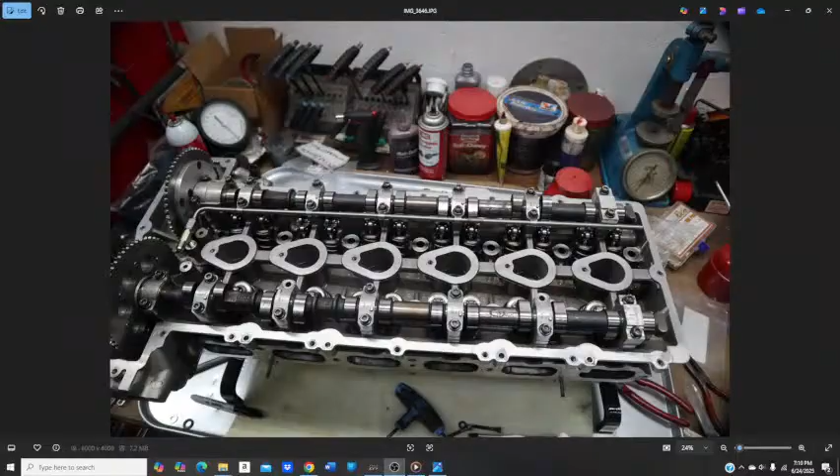So I want to go ahead and give you guys the 4200 update. So let me bring this up. So here's the new oil line. I've got it made. I've got an exhaust piece made. And as I talk to you guys, let me see if I can. No, it won't let me go back. There was a plug, a galley plug here in the. You know what? Let me go back for the people that may not have been here for the last one. Oh, I know why, because it was here. Let's see where we're at.

So with the 4200, we had an issue with...

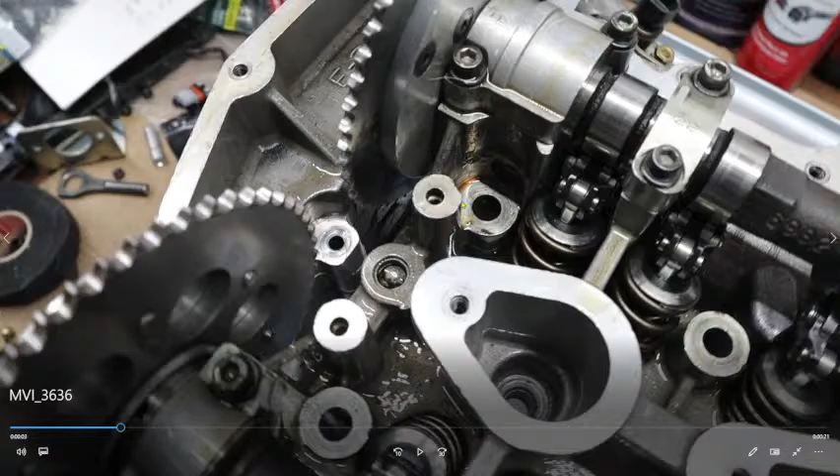We had an issue with the 4200 where we were getting dry exhaust valves, mainly because the exhaust has got a lot of heat in it, but there wasn't enough oiling going to them. And these lifters that are in this motor are solids, and they do not have an oiling system in it.

So we figured out that the only way we were getting oil in was around these caps. It was kind of squeezing oil out, and then the camshaft would start flinging it around. Well, obviously we had an issue, and that's not enough oil. So this was my idea to put some oil lines across here, like they do in NASCAR and endurance racing, where they put oilers to spray cooler oil on the valve springs and get that all working.

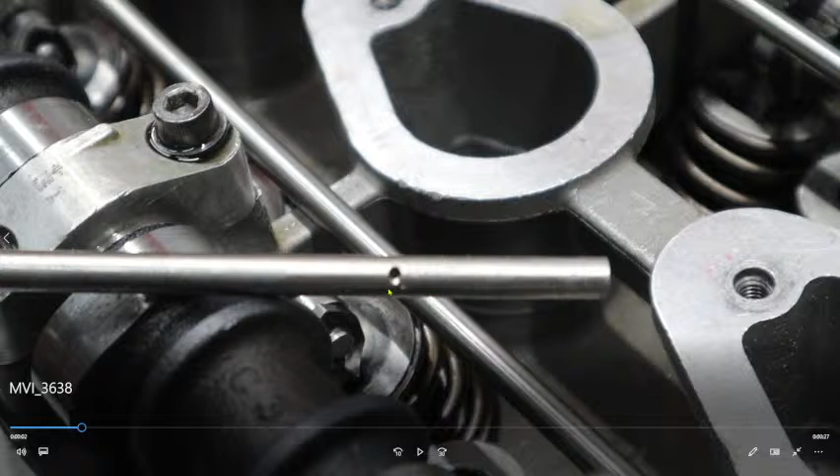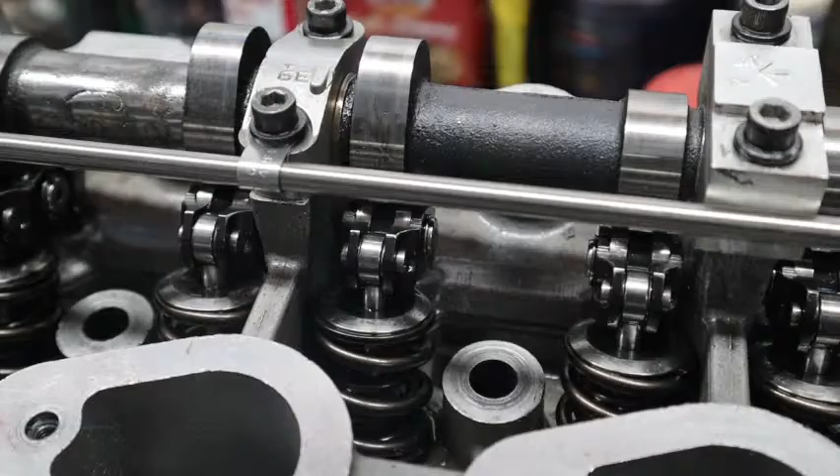So that's what my plan was. What we're going to do is drill a hole. And some little videos I made, just drilling a hole in the tube and laying it out. All right, so after several, went ahead and got the plug out and found out there was a machined hole going into the oil cavity, so that was perfect for us to pick up our oil from. Then I came up with these mounts to hang the lines along the caps. So that's kind of a catch up where we were.

So where's my pictures? All right, so let's go back here. I thought I had pictures on there, but I guess I didn't.

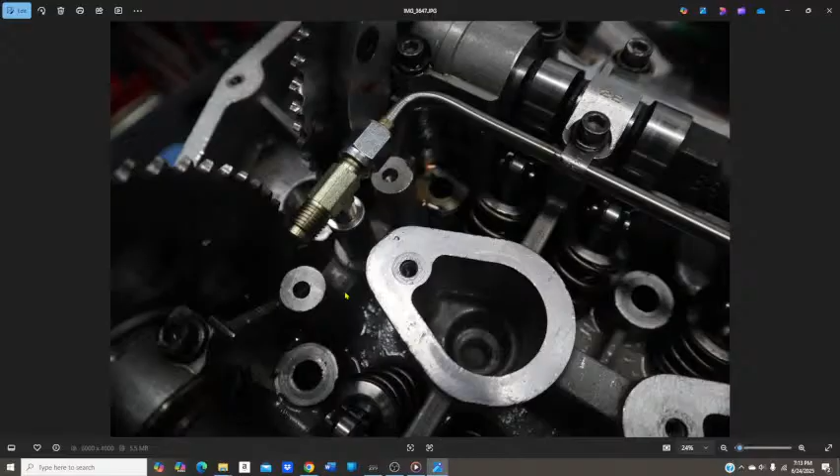So here's our exhaust side pretty much done. I still got to cap this line at the end here, and I still have to do the intake line. I decided not to spend too much time yesterday on it because I had other things I had to get finished with, but at least we got it moving forward. So here's a close-up of, I machined a piece with an O-ring in it so it sits down in the galley hole, and then put an 1/8 inch pipe thread up here.

So with a T piece, I guess that's a T on the street. It's not on the run, but it's -4 on both sides, and then 1/4 inch stainless line with the oiler hole pointing straight down on the retainer on every line. So here, I went ahead and oiled it up, using an oil can. So I don't know if I had any sound on that. Let me replay that again.

So basically what I'm doing here, see if I can get one picture with the oil squeezing out. So there's a hole on every retainer, and right now the line is open all the way to the end. So when I'm pumping oil with a hand pump, there's no restriction. It's filling the whole trough. That's why you don't see it streaming out very heavily, but you kind of get an idea what's going to go on there.

Now, next week I'll have a video of the rails all done, and I'll pressurize it with my Accusump. Right now that's up in Riviera Beach at the Allnick because I need to prime that motor before I turn it over. But I think it's going to work out really well. So my next goal will be get the intake tube done, plug the ends, and then I'm going to use the Accusump with 3 quarts of oil, 60 pounds of pressure on it, and inject the oil and stopwatch basically how long it takes for 3 quarts of oil to go through the cam journals and the oilers, and that'll kind of tell us if our restrictor is the right size or not.

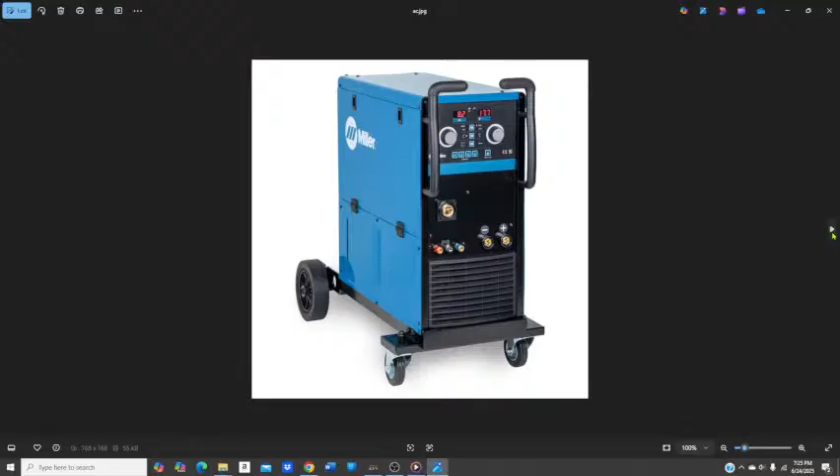See, Mike's in. I can remember my uncle used coat hangers to weld in patch panels on his Chevelle back in the 80s. Yeah, a lot of my dad did. My buddy Bobby in Boca that does a lot of metal work, he's done that also. But like I said, the problem there is, and we're going to get into that, there's no inert gas shield over top of your weld.

When you weld, you're getting the metals to a molten state, and most sheet metals and chromoly and all those kinds of metals have different ingredients. It's not just straight carbon steel. There are different components to make up whatever strength steel or stainless or chromoly or titanium. So it's not just a straight product. So what ends up happening is some of those ingredients in the steel will start melting at different rates, and without a gas shield, oxygen gets to it and oxidizes the weld. So you end up with a very weak weld. But back in the day, it was very easy to do, and guys would do it.

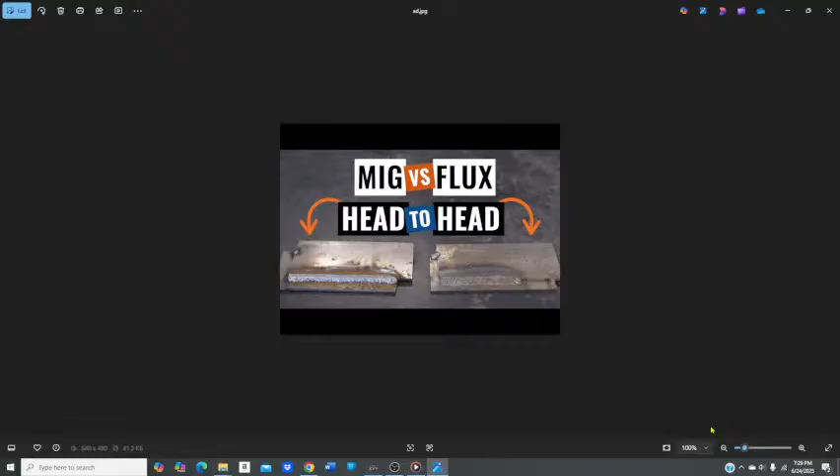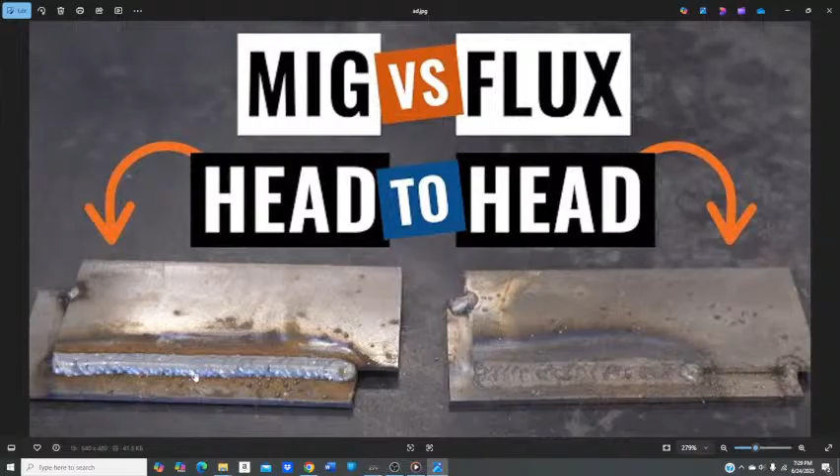So before I was talking about the flux core, and just to show you here, here's a gas MIG, and this is a flux core MIG. Both of them use the same gun, the same machine to make the voltage and amperage, but you can see here with the inert gas, it's a much cleaner weld, because now the gas is making a shield, and when you got the molten metal and the wire feed going in, which melts also, it's got a shield of gas to cover everything, and that keeps all the contamination out.

Now, one bad side of MIG welding is you see all the spatter here. There's a lot of spatter that comes out of MIG welding, so it's not the cleanest weld. You have to go back and do a lot of cleaning. The other thing with MIG, no matter which system you're using, whether it's flux core or shielded gas, is that you have one temperature setting and you pull the trigger and weld. So when you're welding like sheet metal and stuff like that, it becomes a little bit trickier, and that's where you have to do a little bit more practice.

Sometimes, instead of doing one continuous weld, you have to do large spot welds, moving back and forth, say like skipping every 2 inches and going back, and then get to the end and then start at the beginning and keep stacking your welds to get a finished weld. Because if you continue welding at one heat setting, you'll need it hot to start, and as you weld, now the steel starts getting warm and you can back off the heat. But on a MIG torch, you'd have to stop and adjust the machine. You can't continuously weld without having heat build up. So that's one downside of a MIG machine, but it's good.

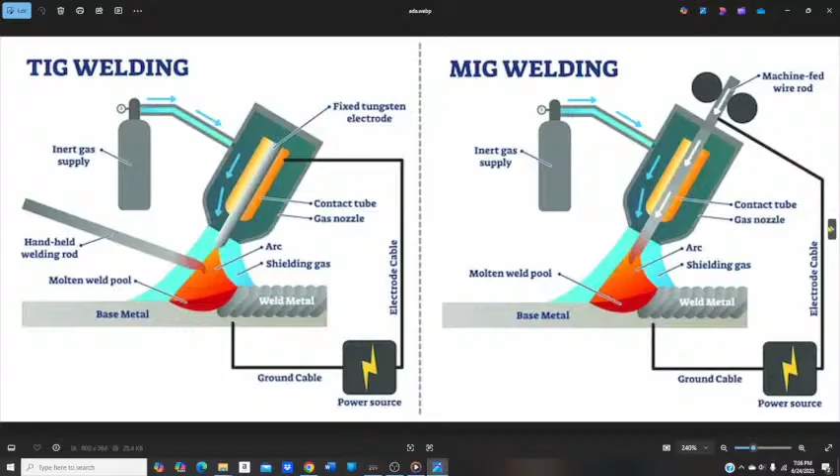You've got your metal puddle here, your molten weld pool. You've got the arc coming from your fixed tungsten electrode, and you've got your puddle of shielding gas. Now the beauty of TIG welding is we have different welding cups we can use. We have different diffusers we can use, so we can change the size of the shield gas immensely, and it just makes it much cleaner for doing different kinds of welds. We'll get into that in a little bit.

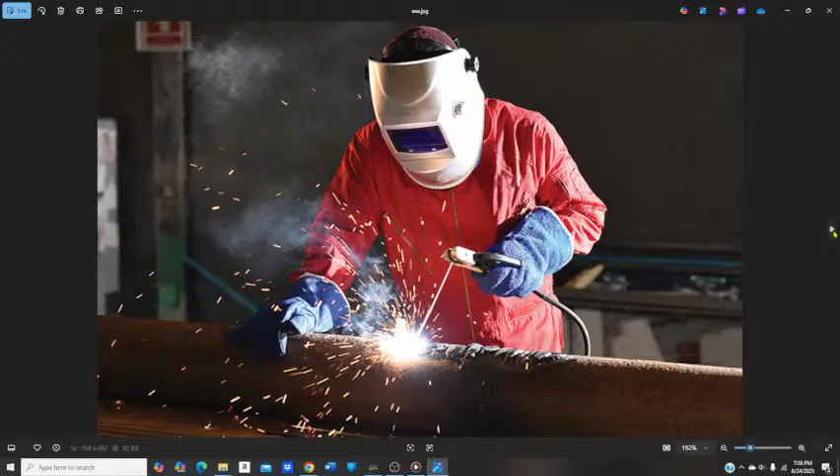There's another guy just doing welding, and this is where stick welding is really good. If you're welding heavy steel, pipe, stuff like that, a stick welder's quick and easy. They have all different fluxes and all different rod diameters. When I was in high school, I was working in Knoxville, Tennessee at Quality Welding, and that was a co-op thing. I was getting credit for work, and I actually built quite a bit of the I-beam for the 1982 World's Fair. And so we would use 6013 rod.

It was a 1/4 inch welding electrode, and the flux surrounding it was almost 1/2 inch in diameter. And I could weld 1 inch plate to 1/2 inch thick 12 by 12 I-beams for the base plates for the structures for the buildings. And you could lay that with one single pass, get a great weld bead out of it, and you just have to chip the flux off. If you use like a 70 series rod, a lot of times the flux will actually peel up for you. It's really cool how some of it will work.

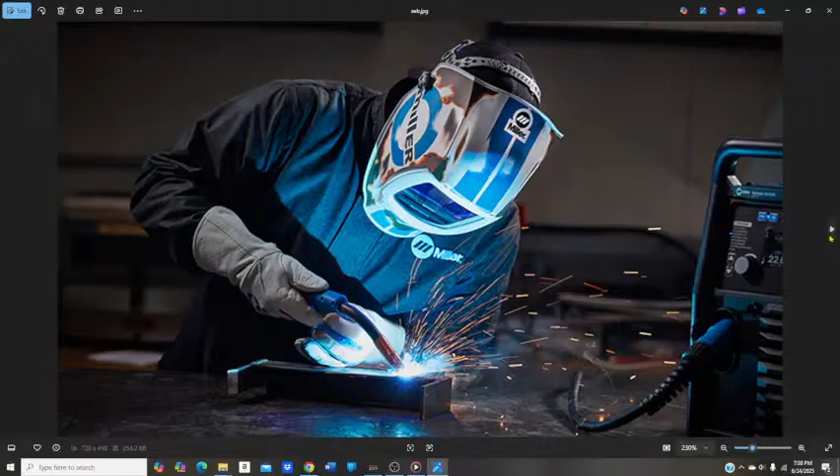Now this guy's using a MIG gun, and it's a little bit different. You've got a gun, you've got wire coming through the cable. You pull the trigger, it feeds the wire. You have two basic knobs on your MIG welder. You're going to have wire speed and amperage. Amperage is going to be heat. Wire speed is going to be the speed that the wire comes out and fills your puddle.

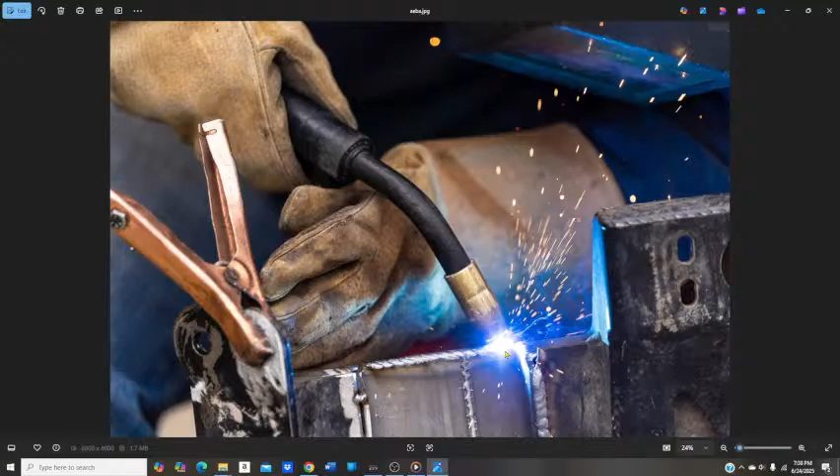So here you can almost see a shield there. The light is hard, but you can see the spatter coming off the weld also. So it's a very dirty weld process. If you're trying to do something clean, like sheet metal work, or you want to make an engine stand or something like that, more than likely you're going to have to do some grinding to get all the spatter off of the material. Otherwise, it's going to have all these little welded BBs all over your material.

But it's a very fast welding process. A weld like that will take you less than 30 seconds, where if you're TIG welding it, it could take you 2 or 3 minutes. So it's just different ways of doing things. When you're in the shop building stuff, you have to think about what you're building, and what welding process you want to use. There's just another guy MIG welding.

Fabrication in a job site where you're doing heavy fabrication, MIG is usually the preferred method, because you're trying to get speed, especially when you're building large equipment, big frames and stuff like that. You can get away with that. The spatter isn't as big of a problem, so when cleanup isn't going to be a problem and end results aren't a big problem, MIG is a quicker way to go.

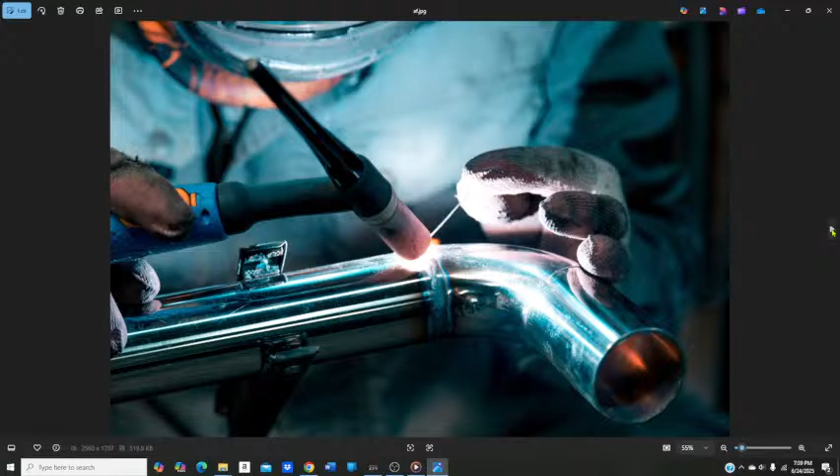Then we go to TIG. Now, TIG welding is great for very thin tubing. Guys can actually TIG weld razor blades together or two soda cans together. So it's very temperature controlled. You usually will have a rheostat, either a foot pedal or thumb control on your torch, to control the heat. Typically, most people will just use a foot control because it's easy while you're welding.

Just like a gas pedal, all the way down is all the amperage; back off, and it's less. And then you can feed it, so you can go back and forth, hot, cold, by popping the throttle up, in and out. And then you use your filler rod. You make the molten weld puddle with the torch, and then you add the filler rod to that puddle, and that's how you create your weld.

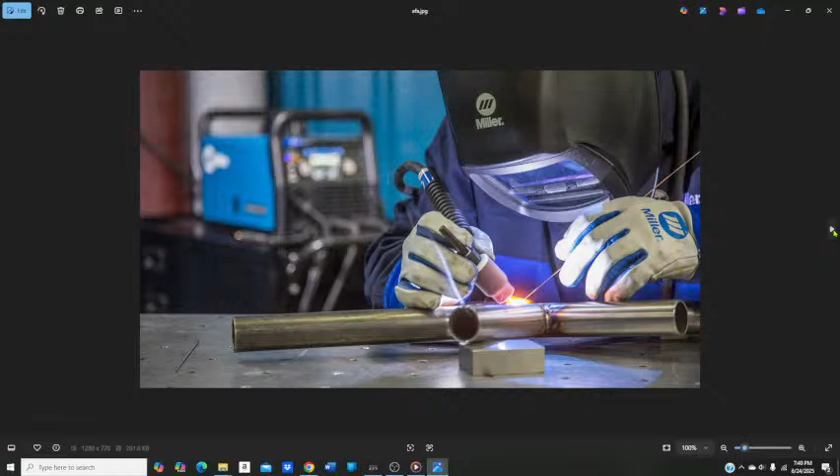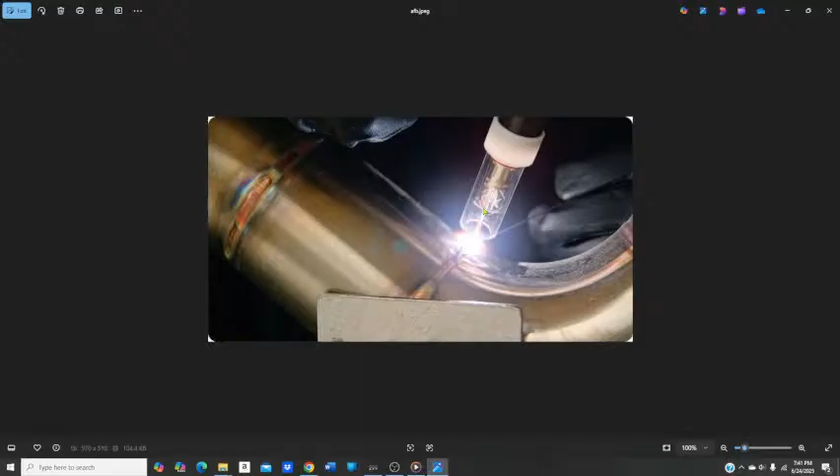And again, here's a different cup that he's using. Another thing with the TIG torches, they're very light, and they have different tools and accessories, so you can control all that stuff. It's really good for getting in tight places. You've got glass torch tips where you can actually see through them. They don't last as long, and they're very delicate, so they're very easy to break. So you have to keep that in mind. But it's very controllable welding. That's why anything that is an exotic metal is typically going to be welded that way.

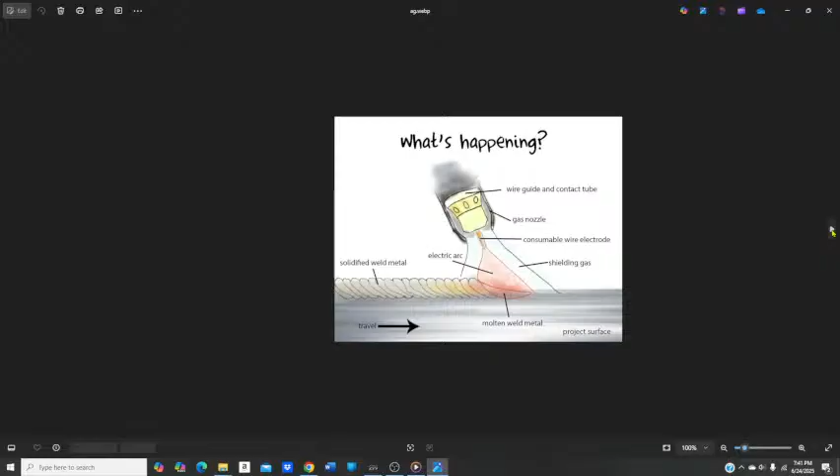So here's what's going on. As we talked about earlier, you've got your puddle of molten metal. That's your components that you're welding together. You have an arc flame coming off of the electrode, and then you've got the shield that's keeping it all protected, so no contaminants can get into your welds. And then you use a filler rod to make your puddle. These have all been dipped in to make your weld. Now these welds are cooling off, and they've already been shielded, so they're nice and clean.

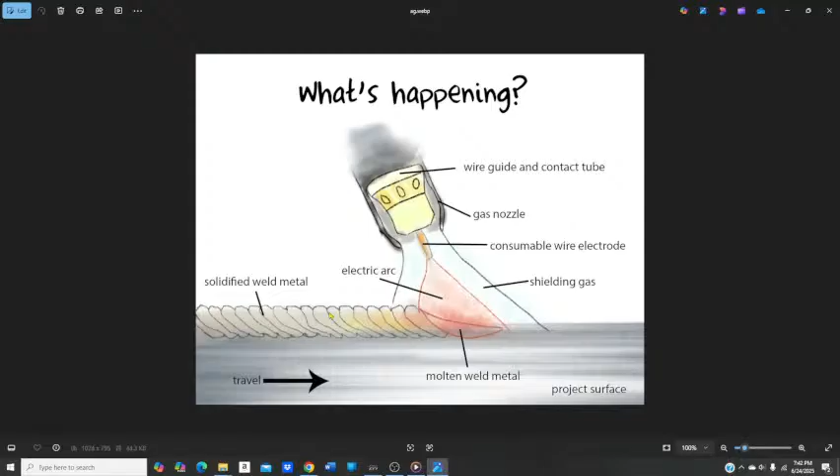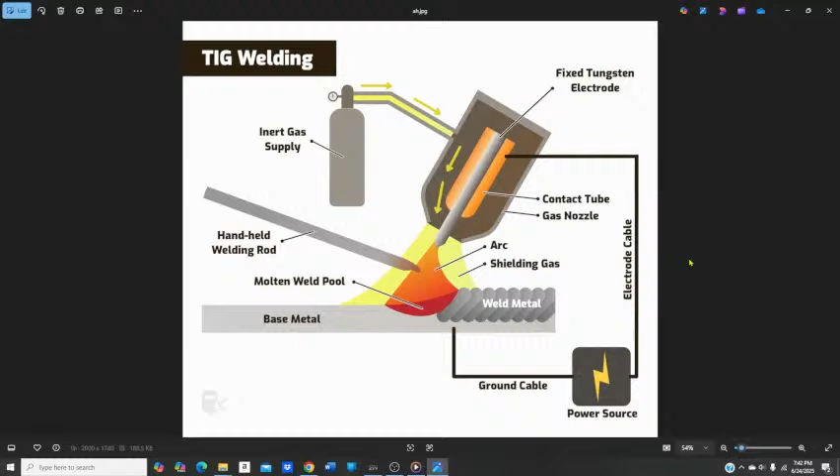But your ER70S-2, S-3, that's what you want with your filler rods. That's what you want with your MIG wire and with your TIG filler rods. That's the rod you want to use for mild steel and chrome moly. That's going to be what you're going to use the most of.

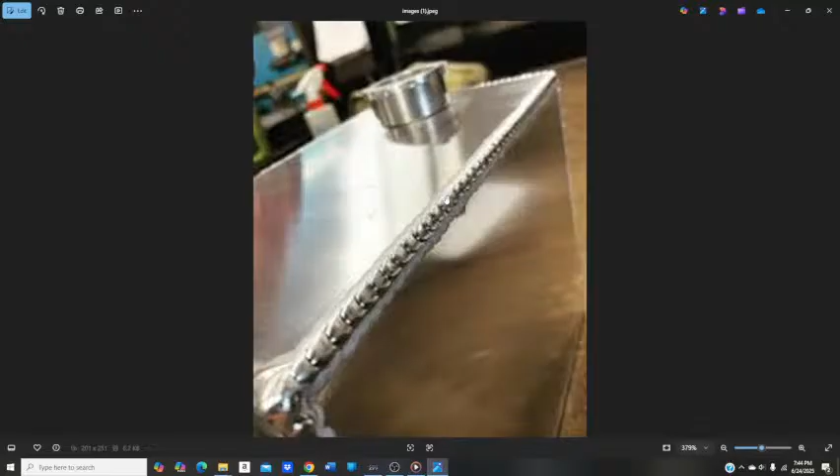Here's just some pictures of some of the welds. This is an aluminum weld, and you can see nice beads there. One of the things with aluminum welding, when you're TIGging it, you can see this little bit of white on the sides. That is where the shielded gas is actually cleaning

the aluminum. So when you're welding aluminum with a TIG welder, you're going to weld it in AC current. So it's alternating current. So the ground and power are switching back and forth. Fancier machines, you can actually control the on and off time for negative and positive. But what that does is that reversion in voltage helps the shielding gas to actually clean the aluminum as you go. So it makes sure that there's no deposits that are going to get into your weld and contaminate it.

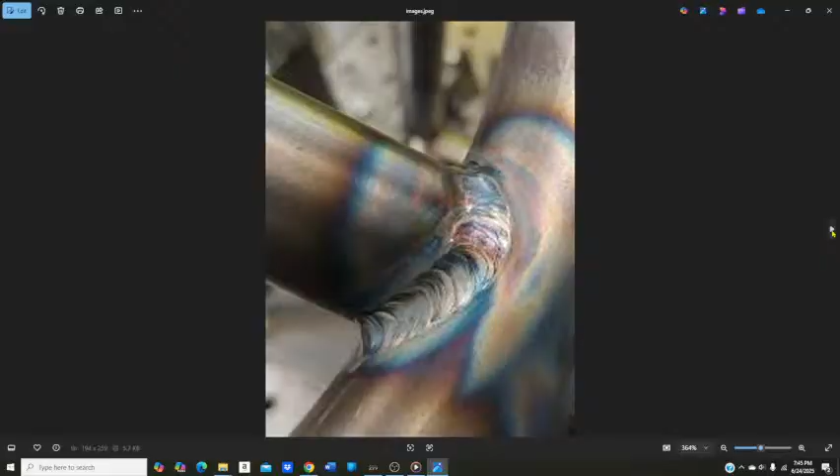Here's a steel or chromoly weld. You can see the little dimes. You know, everybody says stacking dimes. That's basically what you're trying to do. And you can see the way the weld wrapped around where the heat concentration was. That's the nice thing about TIG welding, is you can control that heat where you need it.

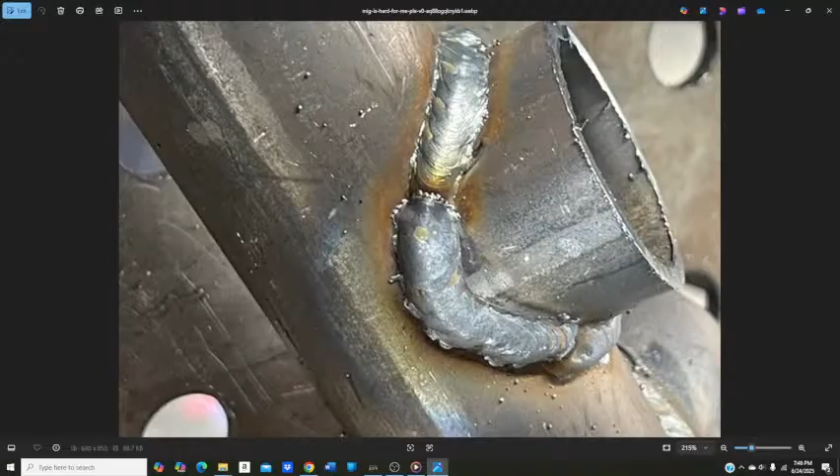Now here is a MIG welded joint. So this is done pretty well here. This is not enough heat, so the weld is puddled up on top of the metal, and it didn't melt into the two pieces of metal. So this section of pipe right here, there's nothing holding it. If that was the way the weld was all the way around, you could smack this with a hammer and it would fall right off.

But this section right here is a decent weld. You can see how the weld puddle is kind of melting into each piece of the metal as it was melting together. But you can notice the little, let me go a little closer here. You can see these little debris marks here, and that's actually contamination getting into the weld because it wasn't cleaned properly. So that's another issue with MIG welding.

And then, of course, the spatter. You can see all the little BBs that are all over the place here. Those are all going to have to be knocked off or ground off to get the pipe cleaned up. So that's why MIG welding is a good welding practice for regular steel. But if you're getting into any of the exotic metals, stainless, chromoly, titanium, aluminum, TIG is a much better way of going. That's why, like I said, if you're going to buy a machine, a TIG machine is probably the best way to go.

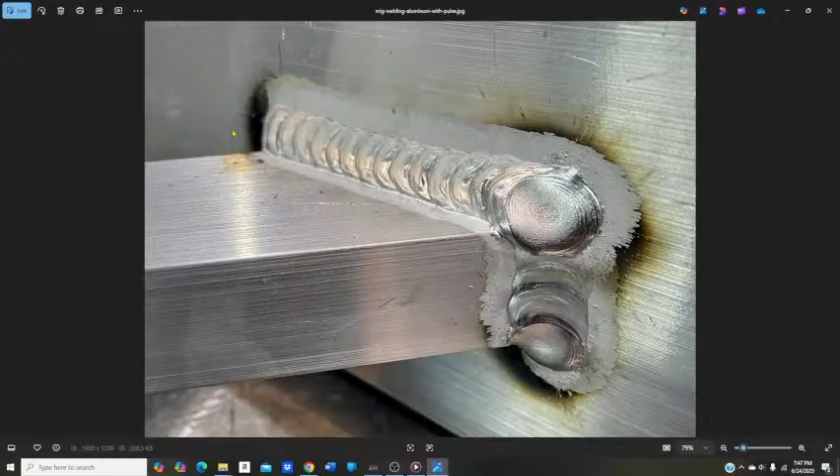Here's another aluminum weld. You can see again how the high frequency switching of the AC and DC, because you're running AC current, alternating current, how it actually cleaned the aluminum around the weld puddle, and it made a really clean weld. Just a very good

So all right, I'm going to show you that in a minute. I made a little video because I'm trying to work on the camera for welding. So why did this not open up here? It's going in the wrong place. All right. Here.

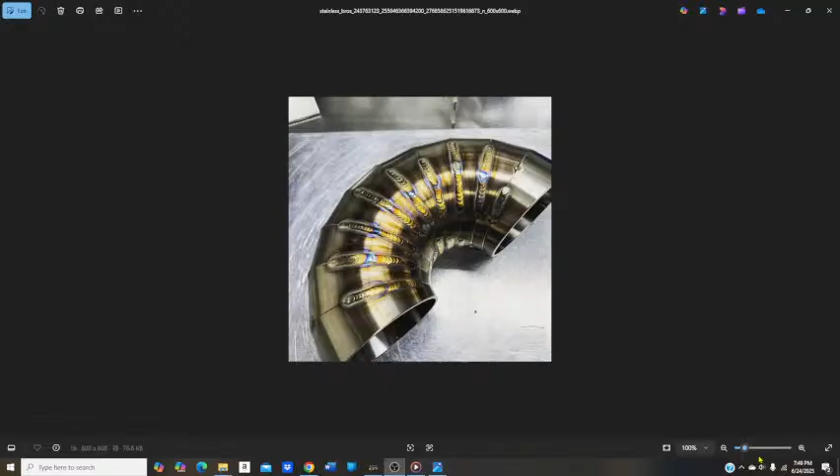Here's a piece of titanium, or stainless rather, and again you see how the color changes are in the weld. So it was a good clean weld, and that's one of the big takeaways, is you always want to clean, no matter however you're welding, steel, stainless, chromoly, aluminum. You want to really make sure your metal is clean. Don't try to weld through painted products, powder coated, anything like that, rusty.

So if you're doing sheet metal work on your car, where you're doing floors or your rust patches and stuff, you want to get in there with a grinder, knock the heavy stuff off with a 36 or a 60 grit, 80 grit, something like that, and then use like a Scotch-Brite style cookie to polish everything out and clean it so there's no contaminants left, front and back, and then you'll have a good metal to put your weld on.

So again, the shielded gas is trying to keep all the contaminants from getting into your weld puddle. So any dirt or contaminants that are left on the steel are going to get in your weld puddle, even though you've done all this work to keep it out. So always clean everything. If you really want to have really good welds, take acetone and clean all the steel before you even weld. And if you're TIG welding, take acetone and wipe all your filler rods before you start welding. And we're going to get into this in part 2, but you want to get good containers to keep your material in.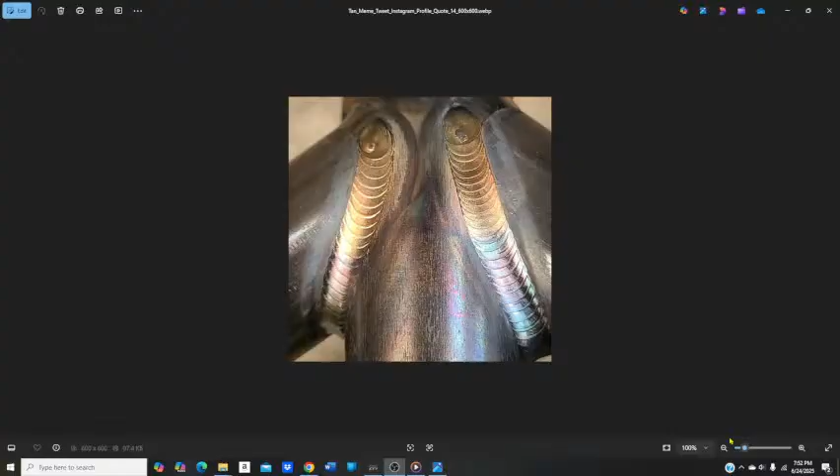And here's, as we say, weld porn. Here's a really nice chromoly weld, and you can see how clean all those welds are. And of course, you can see the discoloration from heat. So it was a nice clean weld because it got the colors. If the metal was dirty, even if you had the heat right, this would all be gray. It wouldn't be colorful like this. So the way that is done is cleanliness, and there's no contamination in the weld joint. So again, cleanliness is one of the most important things there.

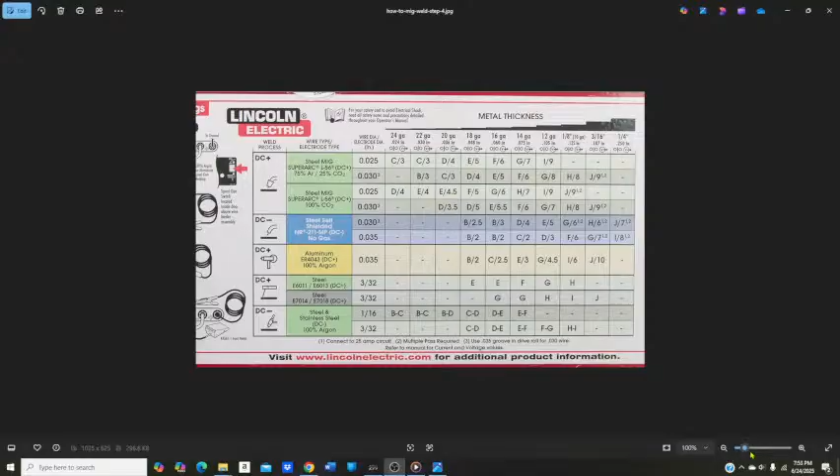All right, so let me get some stuff here. So when you're MIG welding, a lot of times your MIG welder inside the door will have a chart like this, and it kind of gives you some information on what you want to use. Like you can see here, DC positive, steel MIG welding. There's your gas, 75 argon, 25 CO2, so that's your star gas. This is a DC negative for self-shielding, so it's got no gas. That's a flux core. You've got DC positive for your aluminum MIG gun, which then you're going to use 100% argon.

Stick rod, 6011, 6013, or 7014, 7018. And of course, stainless steel. On a MIG gun, you'd want to use 100% argon. But they give you wire size, and then you pick the steel gauge that you're working with. A lot of this sheet metal we work with is either 14 or 16 gauge. So you can say, okay, I'm going to go 16 gauge, and I'm going to do MIG gun with star gas. So it would tell you your temperature is going to be on F, and your wire speed is going to be on 6. So you set your knobs there, and you pull the trigger and do a test piece.

And if you've ever listened to anybody weld, which I'll show you next week in part 2, if the weld sounds like it's frying eggs, then you've probably got a really good heat and wire speed feed package. That's one of the cool things about MIG welding, is you can listen to the weld, and you can pretty much not even have to look at it and know how the weld is going to come out. Now, obviously, you have to look at it to make sure you stay welding on the joint that you want to weld in, but you can hear it and you'll know when you're getting a good weld.

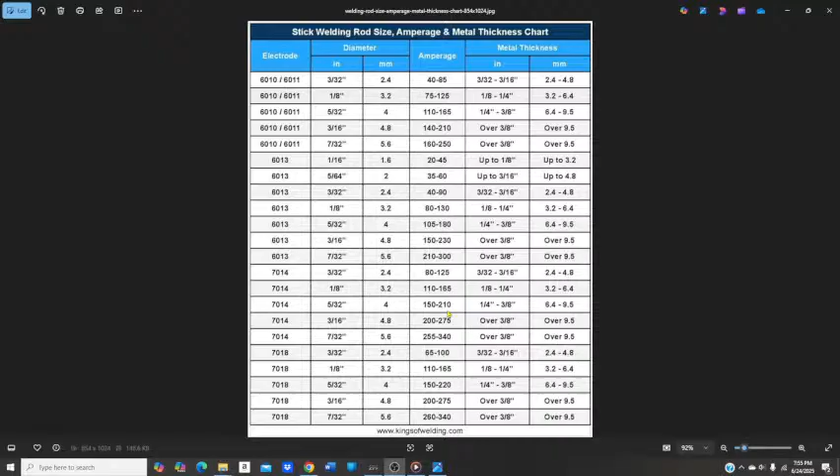Okay, so then what's this one? Well, this is for stick welding, and these charts you can download off the internet also. But for stick welding, here's your electrode: 6010, 6011, 6013, 7014, 7018, and then diameters of the welding rod. And it'll tell you what kind of amperage you should be burning the rod at, and whatever the metal thickness is. So, like I said, when I was welding the steel beams for the World's Fair, I was using a lot of 6011 and 6013. So you can see 7/32 rod, over 3/8 thick, and amperages at 160 to 250, or with the 6013, 210 to 300. And you're running that at a big amperage because you need to make a lot of heat.

Now, you can go into your 7014 and 7018, and it won't. The 70 series isn't as strong as a weld. It's more of a pretty weld. The 6011, 6013 is more high tensile strength, and the 70 series is a little bit less in tensile strength. And again, when we were looking at the ER 70, that is what this 70 is, and ER 60 would be these rods. So the lower the number in the ER, the higher the tensile strength is.

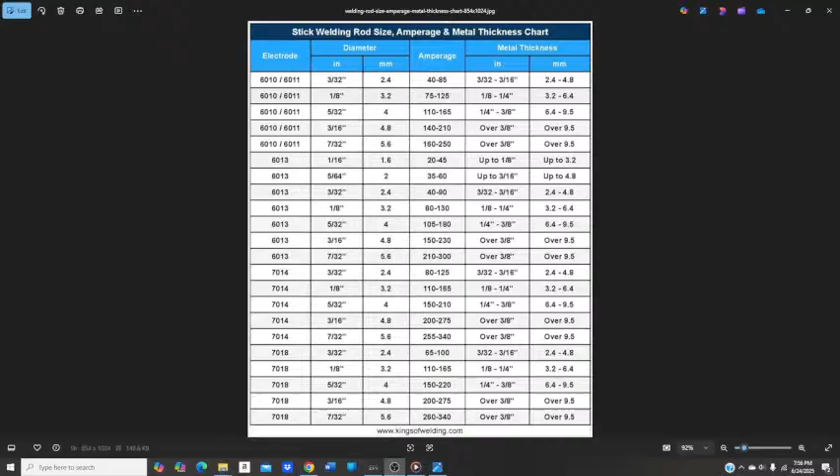And then we can go to... I didn't get a good filler chart, but there's a couple things you've got to look at when you're TIG welding. So in stick welding, your electrode is the steel going into your weld puddle, and that's what's making it all happen. As it's burning, as it makes the arc, the metal is dropping in droplets of molten weld into your weld puddle. So it itself makes your torch or your flame.

In a MIG, you've got your wire feed coming out, and the wire feed's doing the same thing. It's creating a power to ground, which is making an arc, and that starts melting your wire, and that's what creates your flame. And the wire coming out of the gun is what makes the drops. It goes into a molten state and goes into your weld puddle, and that's what creates your weld.

In TIG welding, you have a torch that is just a torch. That's all it's for. So you have different materials you can use in the torch for different kinds of metals, because it's going to have the tungsten, they call that tungsten, it's in your TIG torch, and it's going to create the weld arc, but it's also going to melt. It's a wear item, and it's going to drop into your weld puddle, not at a big rate, but it will. So you have to pick your tungsten for whatever you're trying to weld so that it doesn't contaminate.

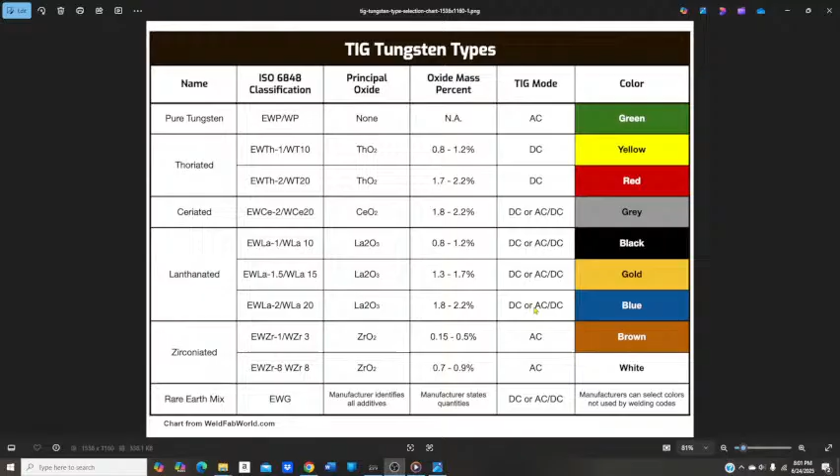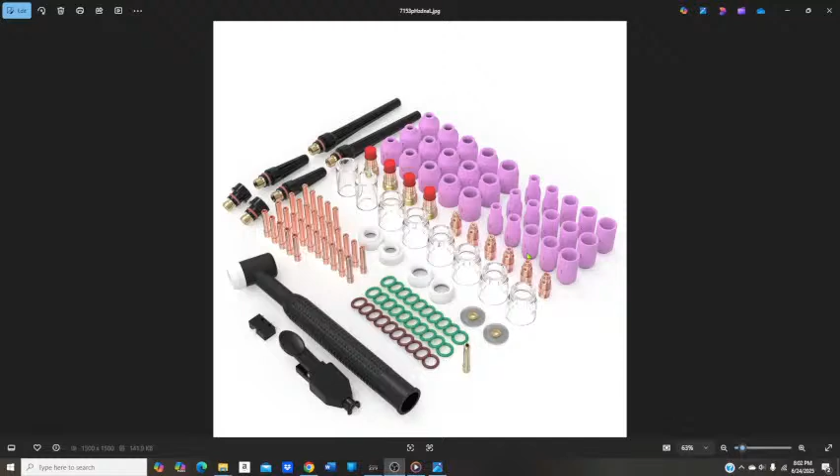This is a different kit that kind of gives you all different kinds of cups. You've got some glass cups, you've got some diffusers here, and stuff like that. So that would be a really good kit you can buy to do multiple kinds of welds. I'm going to go over some of these videos, pictures later. Wanted to show you, where is the...

So this is the cup that I like to use. I got another picture of it, I think. But so this is a gas TIG torch with a small cap. So what you do is you cut your tungsten in 3-inch pieces, and then you can use the short cap, so you can get around like roll bars and stuff when you're working in tight places.

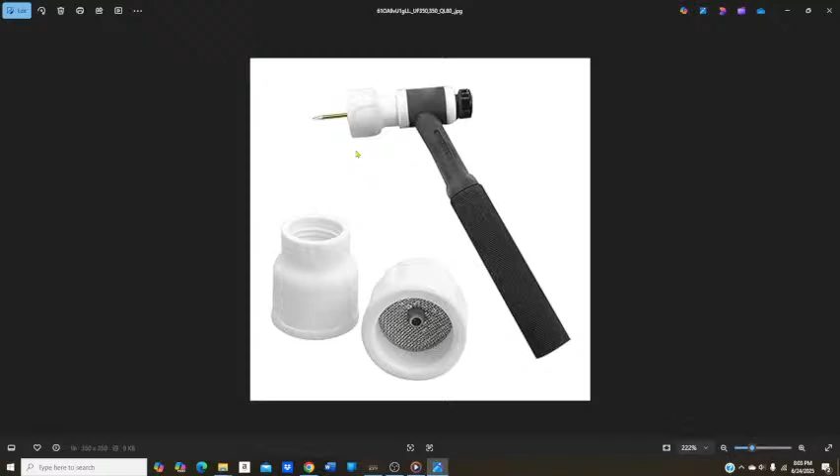And this is a Furick 12 cup. So you can see it's got a screen in here, and that's a diffuser. So this guy Furick was actually a NASCAR chassis builder back in the day, and he started creating his own welding supplies so that he could get his job done.

So typically your tungsten is going to stick out from your cup. Whatever the diameter opening of your cup is going to be is basically the maximum stick out of tungsten you can do. So if you had, let me go back here. Yeah, so on here, you can see with these little cups, your tungsten's barely going to stick out. And then with these Pyrex cups or these bigger cups where they got the bigger opening, now you can stick your tungsten farther out from the cup.

And the reason is when you're welding something flat, you don't need the tungsten sticking out. But when you're welding into a V, the tungsten coming out short will not reach the part, and you're gonna have a big huge flame. The tungsten's not gonna be in the shield right, and it's gonna burn off very quickly, and it's just not gonna be clean. So with these style cups, you can stick the tungsten out farther and get in there and get a really clean weld joint.

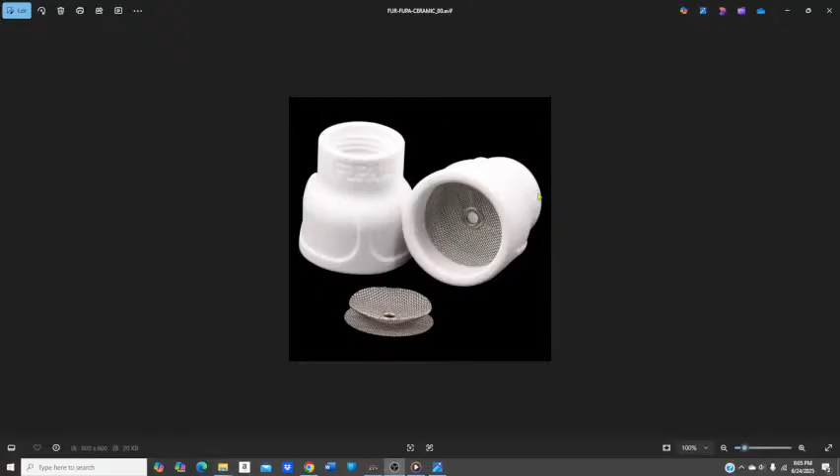And here's another picture of the FUPA cups, and you can see that he's got 2 layers of screen, and then the piece back here that this screws onto has a screen also. So you end up with 3 screens for the gas to come out of. So what that does is the gas comes out the first screen at a high pressure, and it diffuses it. It hits the second screen, diffuses it more, hits the third screen, diffuses it even more, and becomes a very large shielded covering for your weld. And that's why you can stick the tungsten out so far and really get down into a tight V and weld and not have to worry about contamination.

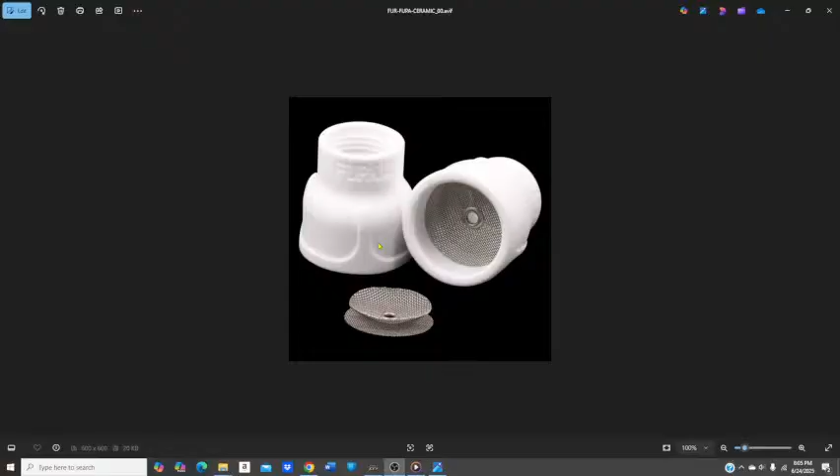So these cups are great. The Pyrex cups are great, but you drop them or hit them on something, they shatter. These cups are really indestructible. It was a really great thing that he came up with, and they work fantastic. So that's pretty much it. I got a couple of little pictures, but I kind of got the point across of what I was wanting to do.

Let me show you this little video. There's going to be some dark spots in it because I've been working with the dark lens, and I'm trying to figure out how to videotape some welding for the next couple shows. So let me get this started here. So here it is. You can see that the filter makes it so dark you can't even see anything. I'm gonna have to work with lighting and stuff like that, but once I get started, I can turn the camera on, go back over, grab the welding torch, and then start my weld. There we go.

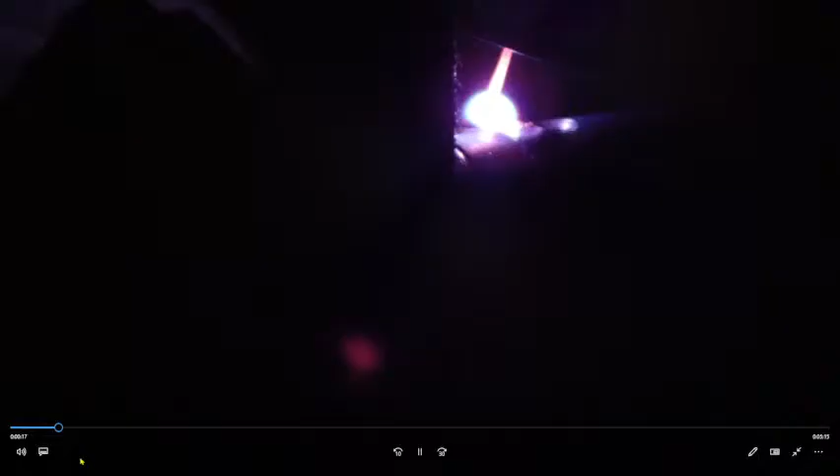So you can see the flame, and you can kind of see the puddle coming out. Now there's a magnet on here, and that's disturbing it; the magnet's trying to draw the flame to the magnet. Now I was just putting a tack in, now I'm rotating the bar. This is a little 3/4 inch rod end tube for the cup bar for the rear end, for the road course rear end, so you can put side load on and create more negative camber.

Still going. Just as soon as I'm done, clamp the bar and rotate it. So in the future, I'm going to try to use 2 cameras and some type of backlight. All right, so here I'm making the second spot weld.

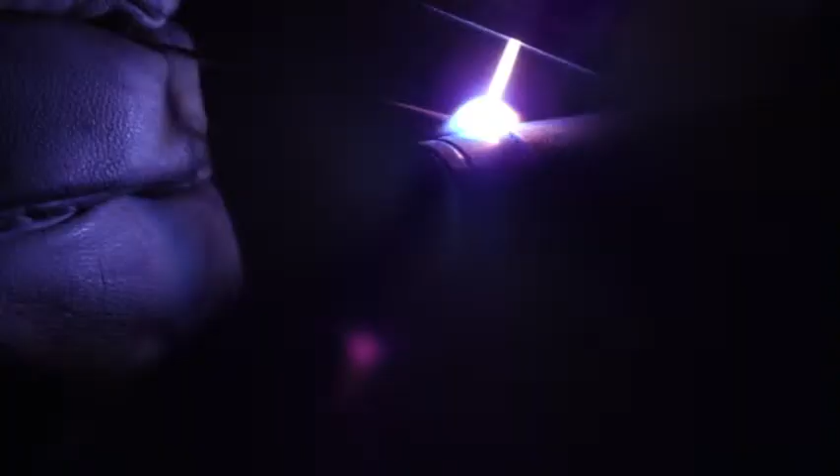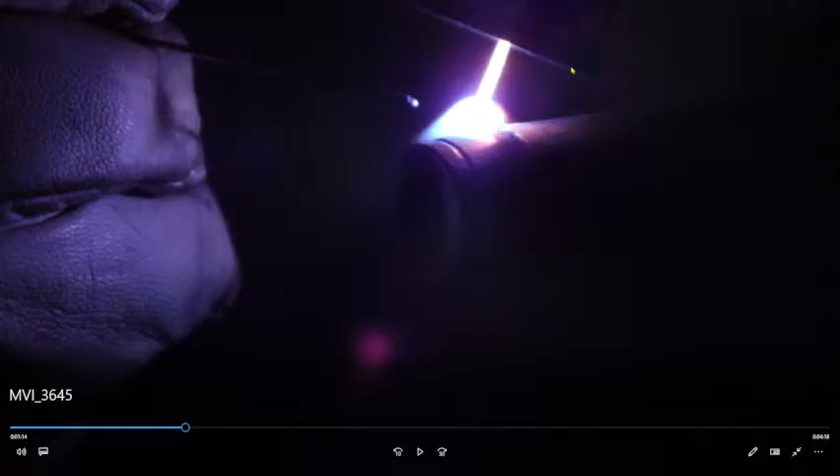You can almost see the outer shield. Let me stop this for a second. You can kind of see out here, you can almost see the gas shield, and this is the flame coming from the tungsten. You can see the tungsten is red hot, and it's melting, making a weld puddle. This angle we still haven't got a weld puddle yet. And then I've got the filler rod in my other hand, and I'm dipping it in, and that's how I'm making the weld.

Now, the other thing you want to do with a TIG is once you've stopped the weld, you can hear the gas continue to run. You want to hold the torch over the weld until everything cools off and the gas times out, so that you still don't get contamination when you end your weld, because it's still molten.

Here I'm welding, I'm doing a rosette, so there's a hole in the tube, and the rod end or the tube end is solid underneath it. So I'm filling that in to combine the inner solid steel to the outer tube. And again, you hold the torch till everything cools off, and you can move on to the next thing. Now I can go ahead and go to the outer edge and start welding it.

So again, I've got to work on it so you can see the weld puddle itself. I haven't gotten that mastered yet. I'm going to work on that this week. That's going to really make this show a lot more. Again, I've got to rotate the tube to the next point. That's what this black spot is. Didn't get a chance to edit this, but

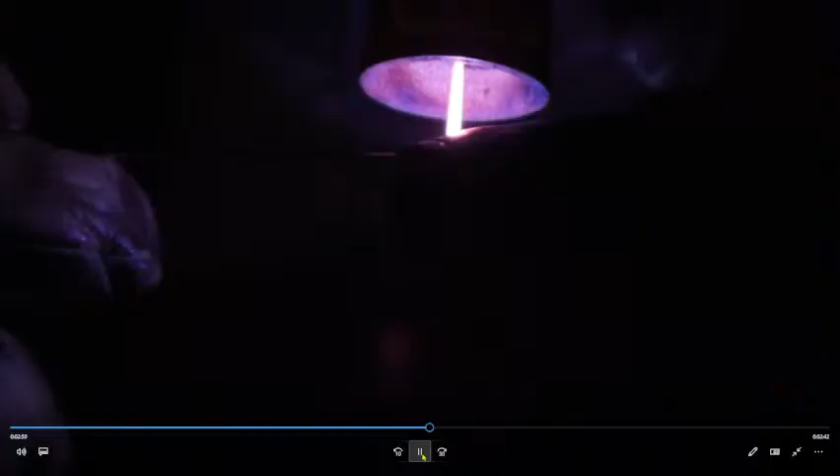here you can kind of see there's the FUPA cup and there's the screen. So that's what I was talking about, and that's what creates a big, huge cloud, a shielding cloud around the weld joint to keep contamination out.

Unfortunately, I didn't get a chance to edit this. There's a second rosette. I know this kind of looks funny here. That's a spot weld, and that's where the last weld stopped because I couldn't get all the way around the tube. So that will get welded up. I know it looks a little funny there, but there I fixed that little spot, and then continue on the other side of the spot weld, go around the bar.

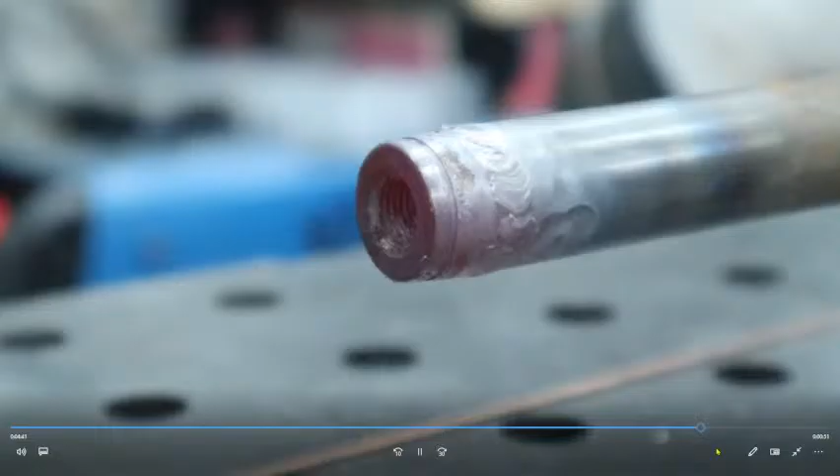And rotate the bar, the tube once again. That's the rosette.

That's another rosette. That's because this weld here around the end could crack the end of the pipe off and wouldn't hold. But if you do a rosette farther down, now it's got more contact patch and it will make a better joint that will not break off. So that was a down and dirty weld on it.

You could see in the weld at the end when I took the filter off that there were little bubbles and stuff on the end. That's because I did not clean this. I actually slapped that together about an hour before the show, and I was kind of running out of time, and I wanted to have something for the thumbnail, so I did that together real quick, but it's not the cleanest weld. I'm not very proud of that.

And it's also zoomed in really tight. That piece of tubing is 3/4 OD with a rod end insert that's for a 3/8 rod end. So the picture looks big, but it's actually a very small component. But I'll go ahead and get the other ones welded in. I'm gonna work on getting a better view so we can try to get the weld puddle.